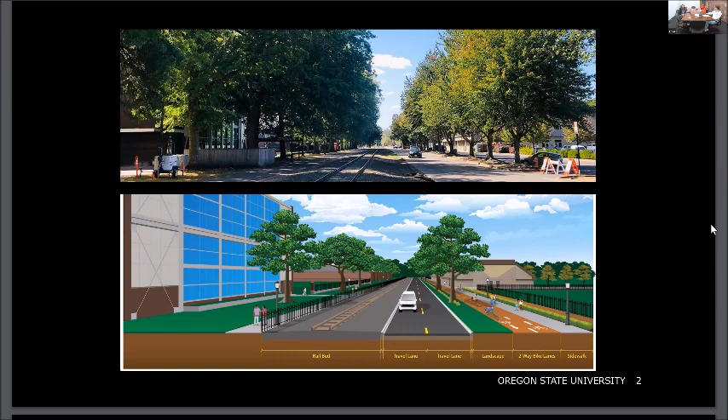Yeah, next slide. So this was the second phase of a potentially 3-phase project. The first phase was completed with a collaborative project with the city and Oregon State in 2014. The city managed that project with the thought that this would be coming shortly behind it. But the railroad literally delayed us about 3+ years working through their process for access and improvements. We're actually still waiting to get some construction and access agreements from them. But we're a few weeks away. So phase 3, I'm not sure if that'll even happen in my lifetime, but it's out there. It's on a plan. Multiple plans.

And then we're going to switch over to railroad improvements at the intersections and along the railroad corridor. And then starting December this year, we should actually get to road reconstruction, and we'll go 35th to 30th for a few months, and then 30th to 26th for a few months, and then finally 26th to 17th. And we'll ultimately wrap up about the end of December with striping and landscape plantings and punch list items.

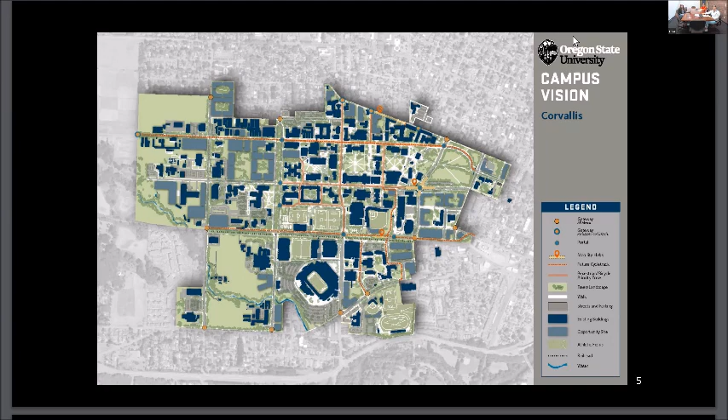As Erin indicated, Washington Way is the first of hopefully multiple cycle tracks. This one going east-west through campus, but we also have some north-south corridors as well. And as I said, we have a long-range transportation plan for campus. We have gone through and classified all of our major corridors, whether they're vehicle corridors, bike corridors, ped corridors, or multimodal corridors. And so we use that as we're going through and redeveloping campus.

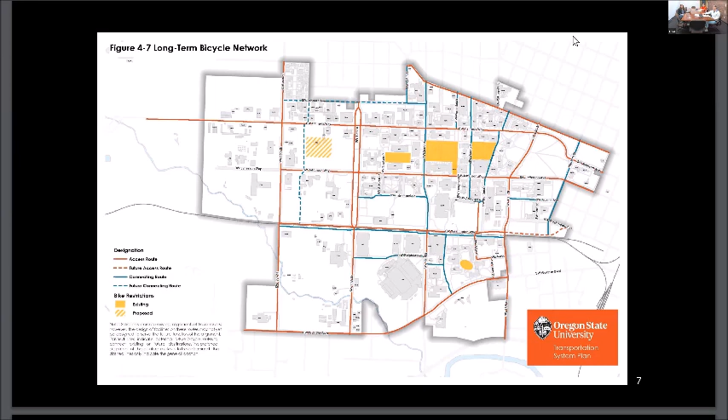And as I said, we were developing our transportation plan concurrent with the city. And as you probably all know, the city has a real focus on establishing the low-stress bike network across the city. It's one of the key ways of getting people throughout the city of Corvallis. And we also recognize there are many people coming to campus who might not feel comfortable biking on some of the major collectors and arterials. So we're looking for ways to connect with the city's low-stress network.

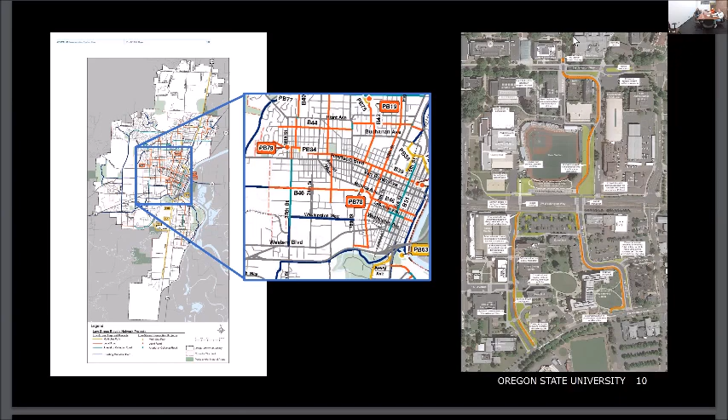So I'll turn it back over to Erin. I just wanted to let you guys know, we have a webpage dedicated to this project, probably because it's been so long anticipated. You can find the web link there, and we'll be updating that website throughout the project with any significant changes to schedules. Schedules at this point, design's kind of set. And if you ever have any questions, feel free to reach out to me. I'm happy to answer. Yes, please.

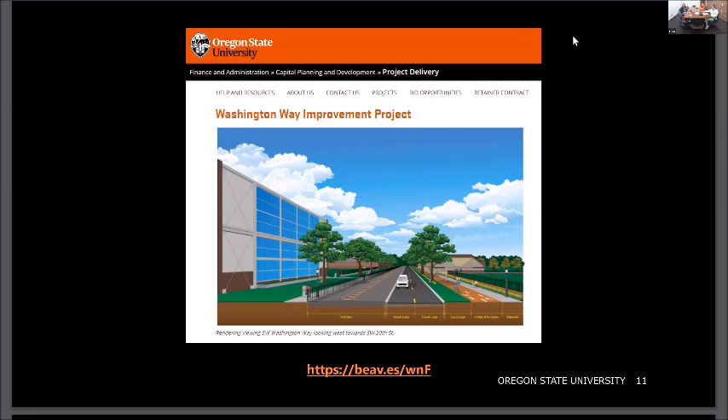And that's kind of an architectural rendering, a little different view of what we may see out there. That's kind of like 30th and Washington Way, where you have the cycle track and the 10-foot sidewalk. So we're really excited. This is going to be a big improvement for that corridor. Does anybody have any questions?

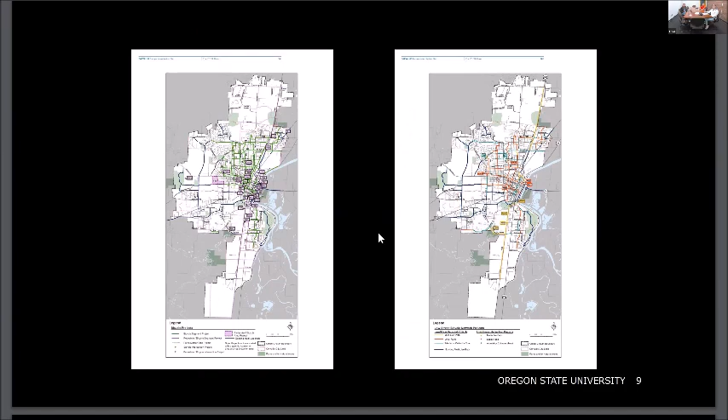I've got a question. I noticed that the cycle path is going to extend east of 15th Street. And I'm just wondering what the timing for that will be. East of 15th Street. Let me go back. So the project, yeah, this one here.

Oh, sorry, it's not my mouse. Don't use someone else's computer. Do you want to talk about it?

So phase 3 is a project that is in the city's transportation system plan. It's the third phase of the Washington Way extension. And I'm sorry, I don't remember the number in the city's TSP, but it's not planned. It's not on the capital forecast for OSU. So it would be with future development and redevelopment in that section of campus. So no date set.

Go ahead, Wendy. Yeah, thanks for the presentation. I heard about this years ago at the Bicycle Pedestrian Advisory Board and was excited about it then. So it's great to see it happening. I'm curious if there's a way for the public to get a hold of those nifty maps you put up about OSU's master plan for the bicycling and pedestrian routes across campus, because I think that would be a great reference. I'd love to have those documents accessible to stare at and enjoy.

That's great. Yes, we actually have a website for our transportation plan. I don't remember the URL off the top of my head, but I will be happy to email it to Steve, and maybe Steve, you can share it with the group. Thank you.

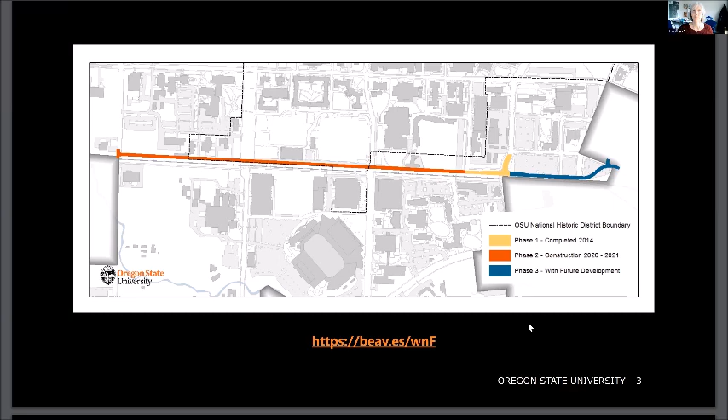Rebecca and I are longtime colleagues and have collaborated on all kinds of things. And she made a mention to the city's transportation system plan, kind of having this gap, and then OSU. And I guess what I want to say to the group is, not just with Rebecca, but with some of her other colleagues at OSU, I have been coordinating for a long time on how to line up what the city's low stress network has been envisioned as with what the campus is also envisioning, because we know that the campus is not an island; people need to get to and from campus.

And so I'm just promoting, to folks who might not know, that we talk to each other all the time and check in on how, when we're doing projects like this, this is a big project, but even much smaller projects, we really do collaborate and try to bring something that joins town and gown together in a transportation frame.

And I just want to say, Lisa, I didn't make this slide for you, and I realize there is an omission here, but to Lisa's point, right now Erin, Lisa, and I are all working on at least 3 projects together that are going to be coming. They're all ped bike focused opportunities. One is a mobility hub at Jefferson, and it was actually funded by the COG, so it's more interjurisdictional than just the city and OSU. Excuse me, it's actually funded by the new statewide transit money, but the COG is managing it. Okay, thank you for the clarification.

And then we are going to be working on some pedestrian and bike improvements at 35th and Campus Way, and then hopefully some pedestrian crossing improvements at Monroe and Kings. And then I omitted the 11th Street Bikeway, which is a horrible omission on my part, but that's coming. And additionally, OSU is working on some other infrastructure gaps. Go ahead, Rob.

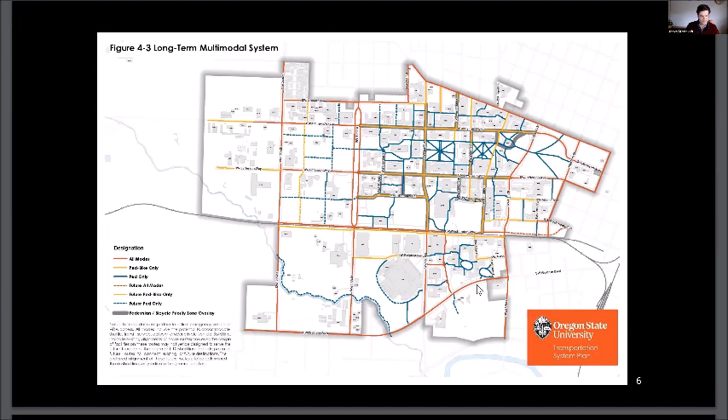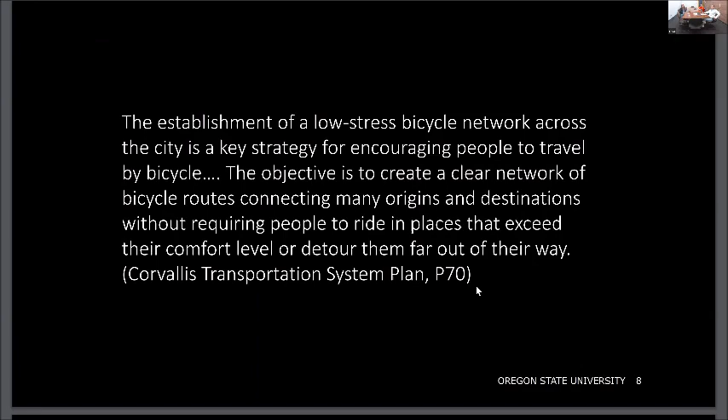I had a question about the perception of safety for people walking and biking. Slowing down cars and having safe, protected intersections are two key things. So I'm wondering how on Washington Way you're going to keep cars from drag racing down that straightaway, and what design principles are in the intersections to prioritize the students and staff crossing the street? I know the lanes are going to be kept specifically narrow to make drivers a little uncomfortable with the width of the road as a traffic calming measure.

And then besides the lighting, raised crossings will help. And there's going to be a ton of thermoplastic markings out there that'll really catch drivers' eyes, and the lighting too. I think pedestrians should be a lot safer, a lot more visible, and a lot more anticipated.

I noticed you haven't joined the World Bollard Association.

I don't know if you follow that Twitter account. No? Okay. Yeah, it just shows all the different ways bollards are beautiful and protect people on the street, but I'm sorry, that was just a little joke.

Go ahead, Dave, and then Dennis. Okay, I noticed that the plan is going to impact the armory and the parking just south of the athletic fields. And I'm wondering if that could turn into a snag. Well, I would say no. The armory is unfortunately no more. It is already gone.

So as a state-owned property, we have to go through a judicious process to demolish resources on our property, so we followed all that. If you're interested in the really cool history of the Navy ROTC Armory, I know there's a link on the OSU website that tells all of the history of that really neat structure, but it was demolished in the summer of 2020. So it is no longer with us. And the parking will also be no longer with us after this project next summer.

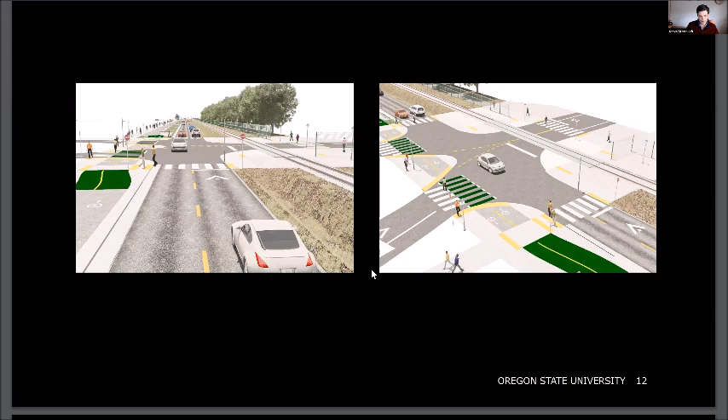Well, I'll take a stab at it and I'll let Erin jump in. The projects that you see on this map are all either currently permitted, in design, or on our capital forecast, which means it's in a 10-year horizon. So some of them may seem a little bit farther out, but they're definitely planned projects, which is pretty exciting. Lisa can attest to how long some of these projects have taken to get going. So I definitely foresee some significant improvements. I'm really excited about the mobility hub. I think that's going to be a wonderful change.

Washington Way. And then we have an application to vacate 16th Street and A Avenue. In the section that you see here, we actually have a steam line that's failing. It's actually a city street. And we have an application into City Council, which will be going to public hearing on May 16th, where we're going to be requesting that the city vacate that, which means give back the right of way to the university.

And if that is successful, we'll be able to repair a steam line, and we'll also be able to start another section of this. The long-term goal, as you'll see in our transportation plan, is to have a low stress network all the way from Western up to Monroe through the Benton Place corridor. This one's going to be in design within the next year, and then ultimately all the way up to Monroe Avenue. So it's going to take a little time, but over the next 4 to 5 years, you're going to see quite a bit of change.

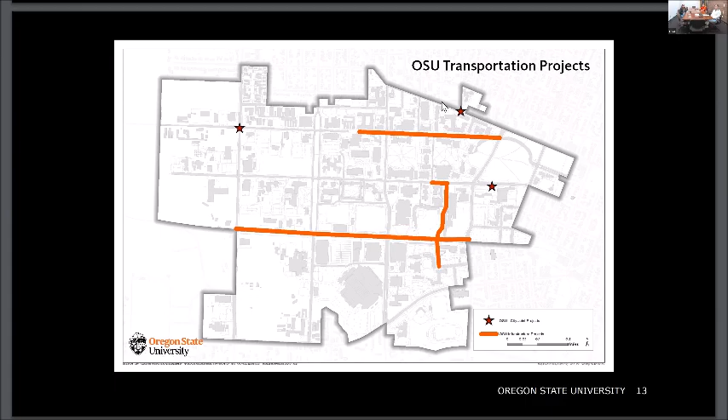All right. Thank you all so much for coming to our meeting and presenting this. This is just wonderful. I think this project is really going to raise awareness about what a truly safe multimodal design is, and raise the standard. It's such a great example for our city and other cities too. So thank you so much for sharing it, and thanks for coming.